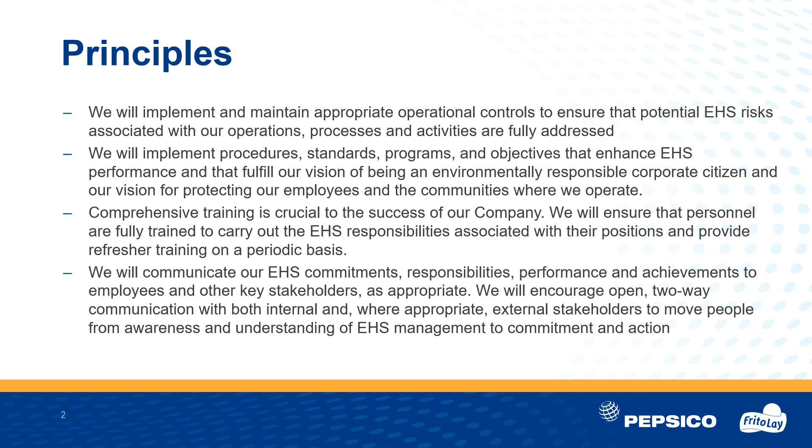Summary of requirements. All equipment, existing and new, must be fully risk assessed and suitable risk control measures implemented. Systems, processes, and capability must be in place to ensure this risk assessment need is met. All equipment must be technically reviewed to ensure adequacy against the following: guarding, control systems, interlocking, emergency stopping, pneumatics and hydraulics, energy isolation, labeling, noise, and ergonomics.

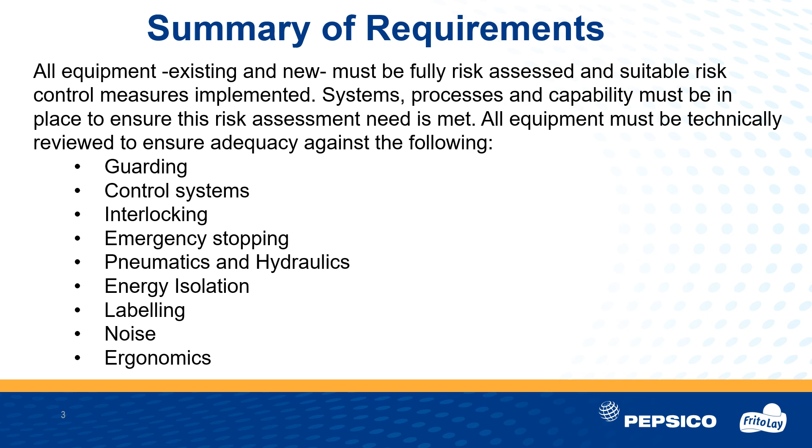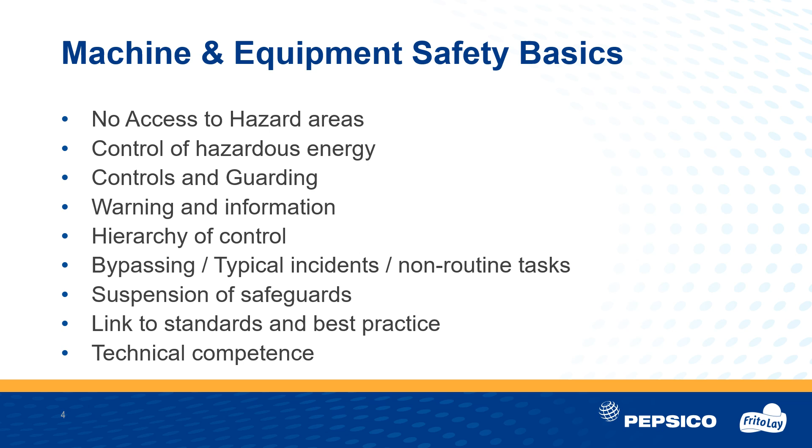PepsiCo requirements. Every employee and contractor is afforded a safe workplace. Therefore, all equipment will be safe. PepsiCo will comply with all local legislation. PepsiCo will set a global minimum standard for all equipment regardless of location. One design to meet all standards. One global machine concept.

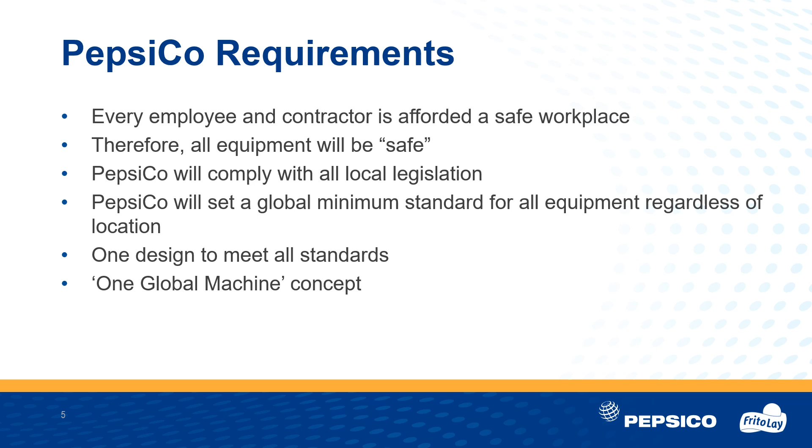Scope and application. This standard will apply to all fixed and portable machinery used on PepsiCo sites by PepsiCo personnel and that are used by personnel other than PepsiCo, owned or hired by PepsiCo and operated within its sites. This standard is intended to cover all new machinery, significantly rebuilt or manufactured machinery, transferred machinery, and existing machinery.

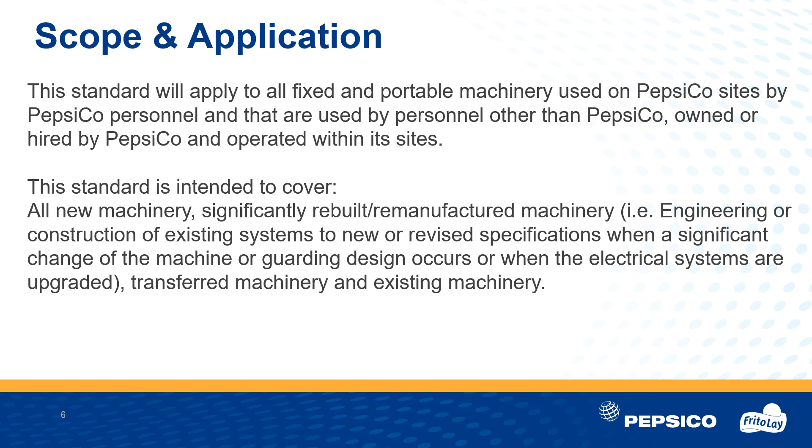Hazard and risk assessment. Requirement. A risk assessment on all operations that involve plant, machinery, or equipment hazards must be conducted. Competent person or persons with suitable knowledge in operations, maintenance, health and safety, and machine safety technical principles shall perform the risk assessments. Methodology, guidance, currently 5x5 approach or HRN machine RA methodology.

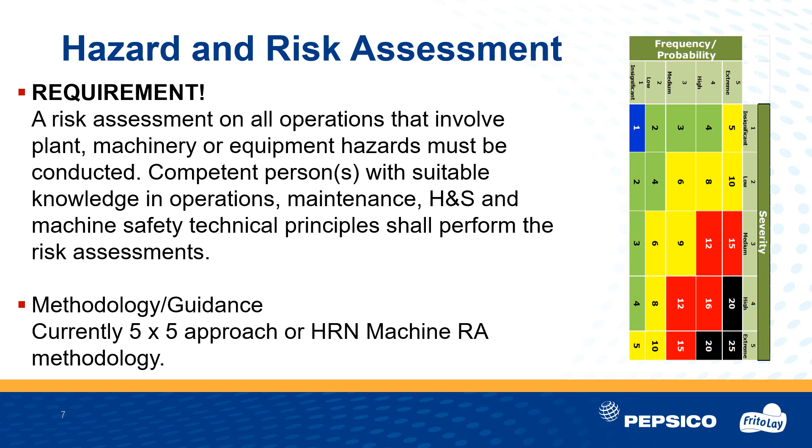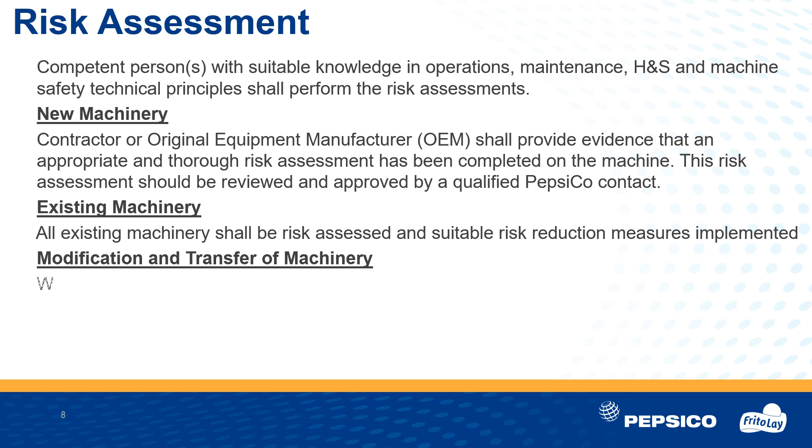Risk assessment. Competent person with suitable knowledge in operations, maintenance, health and safety, and machine safety technical principles shall perform the risk assessments. New machinery. Contractor or original equipment manufacturer shall provide evidence that an appropriate and thorough risk assessment has been completed on the machine. This risk assessment should be reviewed and approved by a qualified PepsiCo contact.

Existing machinery. All existing machinery shall be risk assessed and suitable risk reduction measures implemented. Modification and transfer of machinery. When a machine is modified or transferred, regardless of the extent of the modification.

Risk assessment. Competent person with suitable knowledge in operations, maintenance, health and safety, and machine safety technical principles shall perform the risk assessments. New

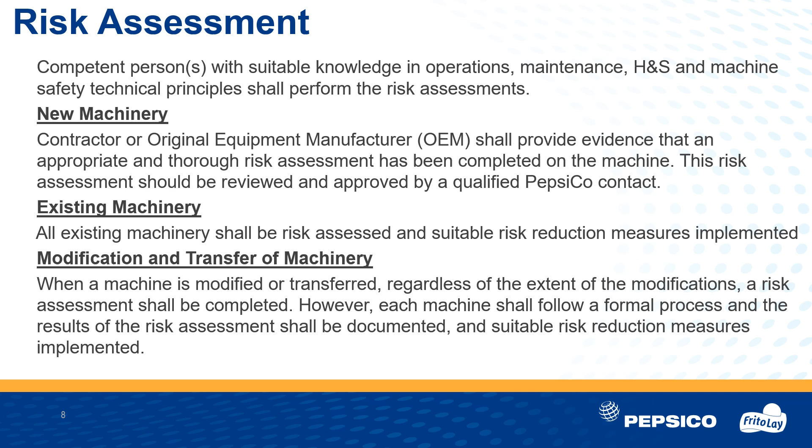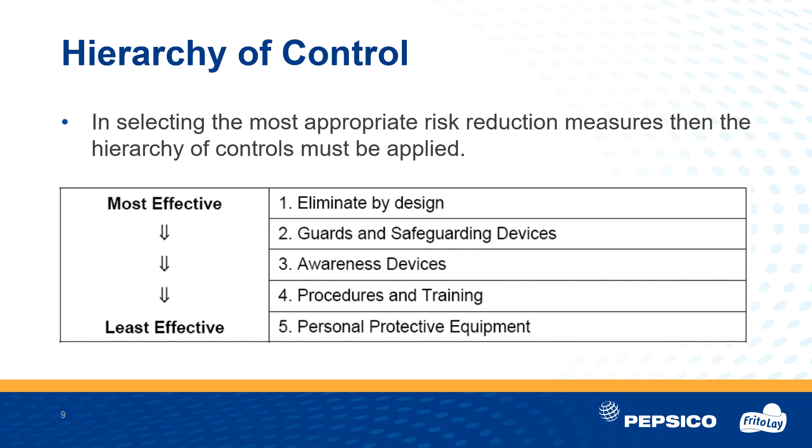Hierarchy of control. In selecting the most appropriate risk reduction measures, the hierarchy of controls must be applied. Most effective, number 1, eliminate by design. Number 2, guards and safeguarding devices. Number 3, awareness devices. Number 4, procedures and training. And the least effective, number 5, personal protective equipment.

No access machine guarding requirements. No person should be able to come in contact with a machine hazard during normal or abnormal operations of equipment. Guards should be designed, constructed, and positioned to prevent body parts from reaching machine danger zones.

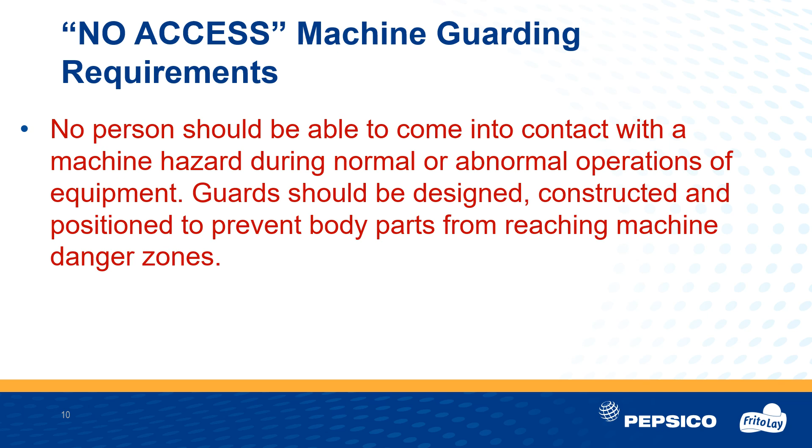Mechanical and structural guarding design requirements. Guarding shall be securely anchored to the machine. If the guards are fixed, they shall be affixed such that tools are required for removal. This would likely exclude the use of slotted screws, wing nuts, quick release fasteners, and other finger tightened devices. Guards shall only be removed by trained and competent personnel.

Guarding shall be constructed and installed so it does not present a hazard in itself. Machine guards shall be installed, inspected, maintained, and operated to protect against unauthorized adjustment or circumvention by the operator or others. The guarding structure shall be designed so the operator or mechanic can easily clean it.

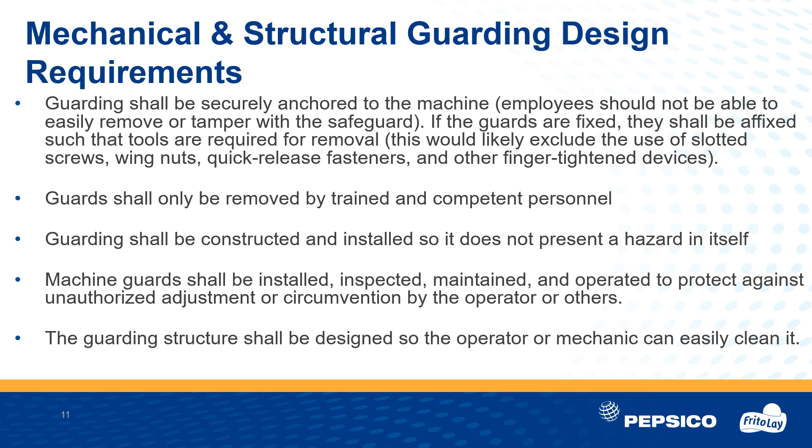Movable guards, safety interlocking, and control system design requirements, machinery. Guard doors shall not be used to initiate a stop or restart of the machine. A sufficient number of operator start-stop buttons shall be provided at typical operator stations to prevent this from happening. Note, the design and installation of all safeguarding and safety-related control systems shall be reviewed by the project engineer and the HSE manager to verify appropriate application of these controls.

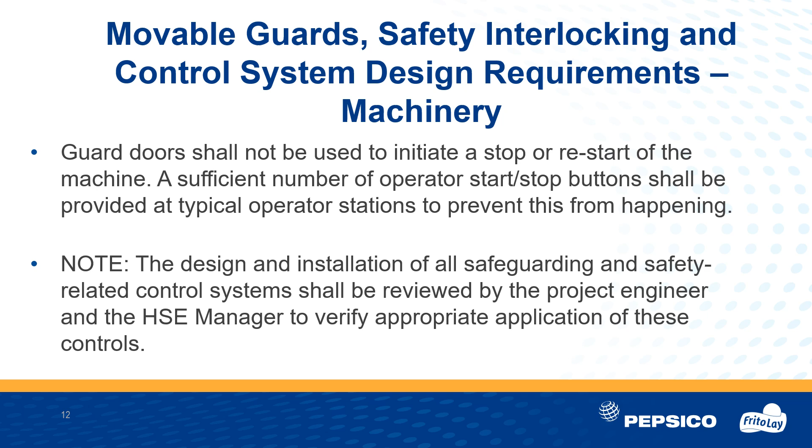Energy isolation. Equipment shall be designed with local, readily accessible, lockable energy disconnect devices having the capability of de-energizing every hazardous energy source on the equipment. When more than one energy source can cause equipment to operate unintentionally, multiple local energy disconnects must be installed. To the maximum extent possible, local energy disconnect devices shall be designed and installed outside of the machine guarding.

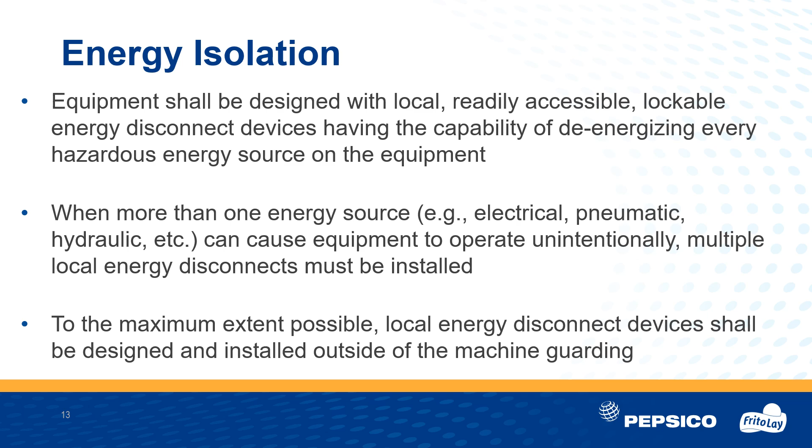Where it is necessary to suspend safeguarding, a mode selection device or means capable of being secured in the desired mode shall be provided to prevent automatic operation. In addition, one or more of the following means shall be provided. Two hand controls, only if operated concurrently by one person. Initiation of motion by a hold to run device.

A portable control station with an emergency stop device and, where appropriate, an enabling device. Where a portable station is in use, motion may be initiated only from that station. Limitation of the speed or the power of motion. Limiting of the range of motion.

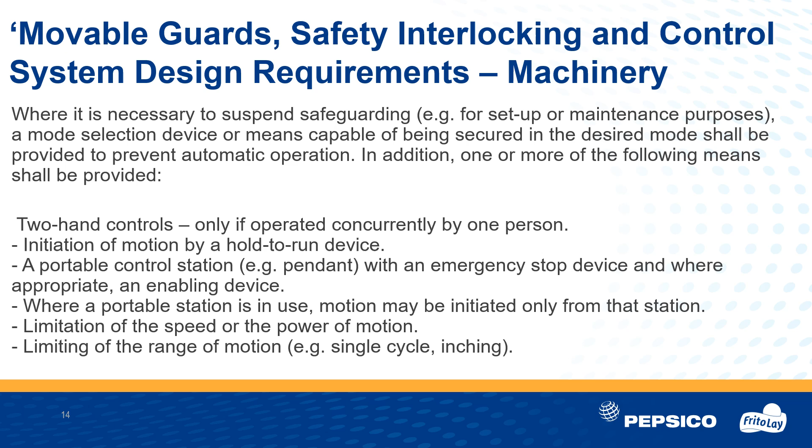Emergency stops. All emergency stop controls shall be positioned such that an employee cannot inadvertently actuate the control. Access to initiate the emergency stop shall not be impeded by guards, shrouds, or by recessing the button. Emergency stop buttons must be red with maintained contact and a mushroom head operator. Emergency stop devices must be clearly identifiable and accessible. The background immediately around the push button shall be colored yellow.